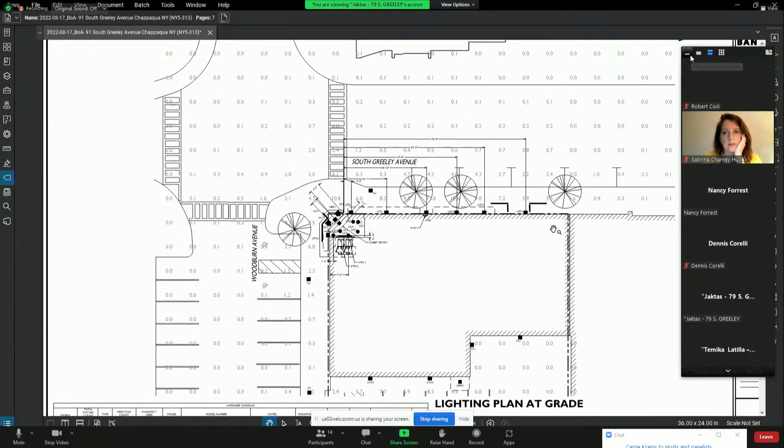Alright, so I'm going to be going through the lighting changes that we've made since our July 5th meeting. Basically, previously, our lighting levels within South Greeley Avenue were a lot higher than the board would like to see. We went back and revised the levels to still meet the state and bank ATM security lighting standards, but also drastically reduce these levels, anywhere from 75 to 80%, along South Greeley Avenue. This has been done by removing those area lights that previously were being proposed along the wall, really getting rid of that stadium kind of feel, and basically proposing only security wall packs. By doing this, you can see the levels have essentially reduced 80% or so all along South Greeley Avenue, and more importantly, we do comply with the state ATM security lighting standard.

So we still have some spillage on South Greeley, but you've indicated that this is now reduced with these new strategies? Yeah, essentially. So along South Greeley Avenue, you can see basically in the middle of the roadway at 0.5 there. Previously that was all the way up to 5, and we were seeing spillage over 1 along the actual opposite side of the roadway. This is basically reduced down to 0 here, really doing the best we can by limiting the amount of spillage that's being created, but also complying with those compliance radiuses associated with the ATMs and the after-hour depository along South Greeley.

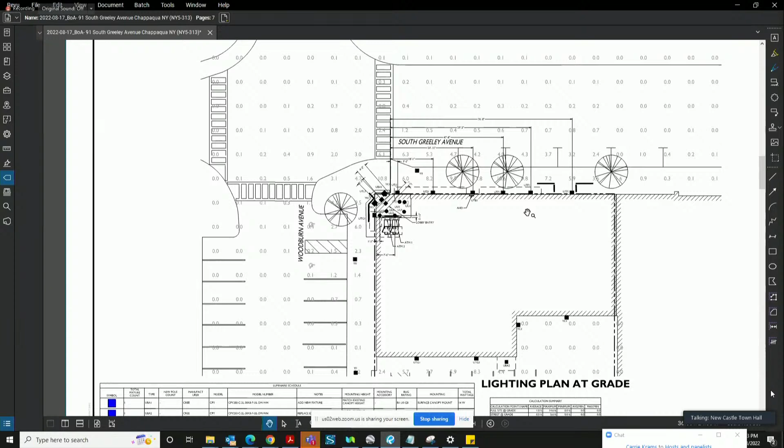I mean, yeah, naturally the LED lights will be more energy efficient. And that's just something the bank, when they're upgrading their sites, is really looking to implement these LED fixtures. Got it, okay. So for clarification, the light level requirements that we're trying to meet here, where, at what point, how's that measured? Is it at the 5 foot height, at the task height of the depository itself? Is it the sidewalk level? At what point is that measured?

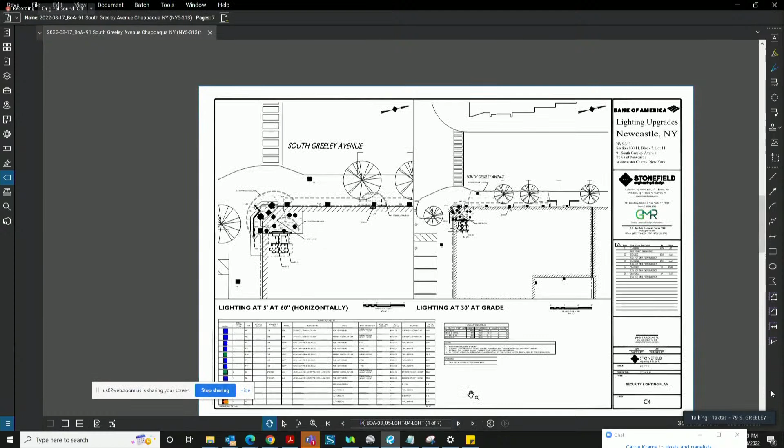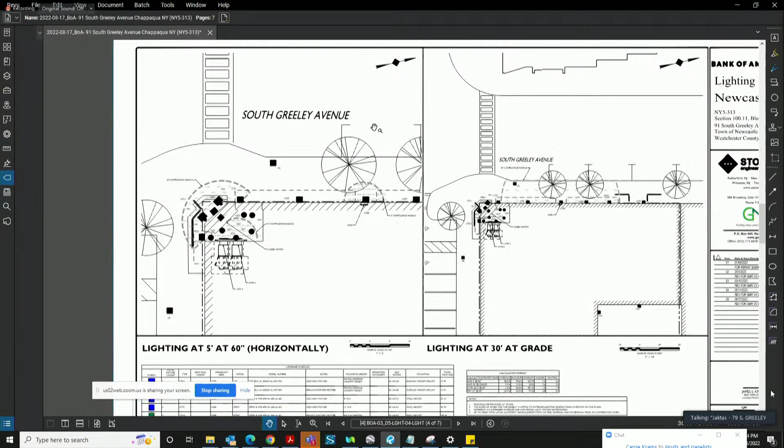So there's different compliance radiuses. I can go to the security lighting sheets that we have. Essentially it's measured at the face either of the after hour depository or of the lobby entrance, all between a 5 foot radius, a 30 foot radius, a 50 foot radius, and a 60 foot radius. And then depending on the compliance radius, it's either measured at grade or horizontally, 60 inches horizontally, or also 60 inches vertically above.

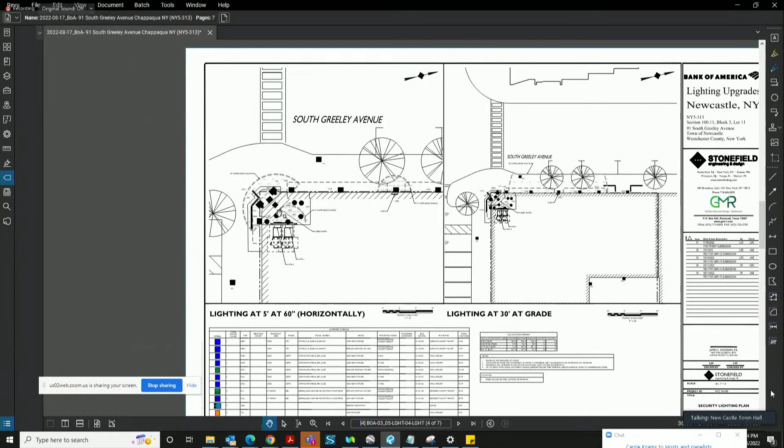Right, and I've seen that from your drawings, looking at them the other day. But I'm asking the question just for the benefit of the public so that they understand the requirements we're trying to meet here, because there may be some people who will say, gee whiz, look at what's happening here. So I'm looking at the requirement for lighting at 5 feet, 60 inches high for that 5 foot radius, and we're up at around 48, 49 foot-candles at the inside of that radius where the wall is, right?

So that's essentially pretty much the task lighting, and most of that lighting is gonna be on these wall washers? Most of it's gonna be on the wall? You're talking about outside of the building or within the actual buildings? We have a mixture of canopy lightings.

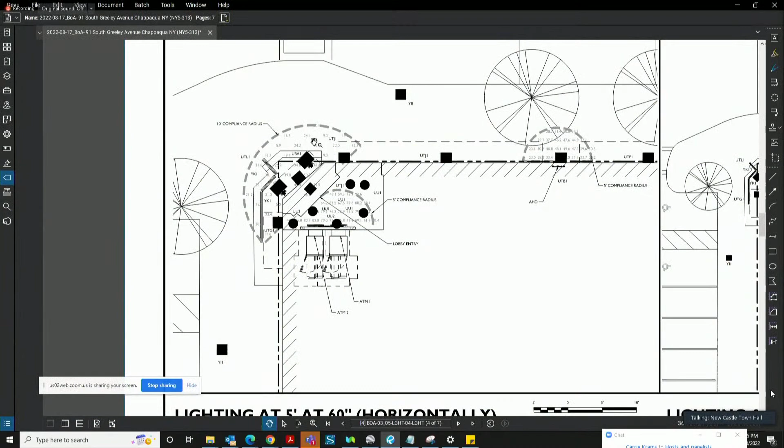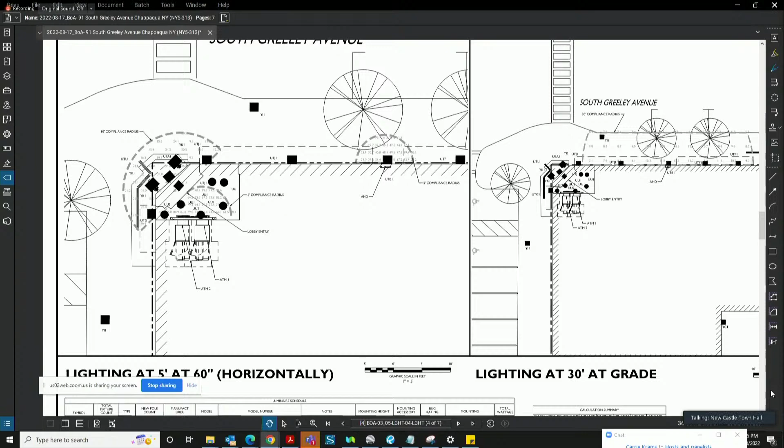Sorry, I was just curious. Last time we looked at this, I think we had talked about an elevation. Is that overkill, just to know the heights at which these light fixtures are?

It's just easier to see it, where they're placed on the side. Mounting heights are provided within the luminaire schedule, but are you asking for an actual elevation of the building?

Well, maybe it's overkill, but I really think it's probably useful because in my mind, these are really too high up. They're gonna literally flood that entire area and beyond. What would also help is probably a photo of something else you have actually installed in some other location. That might help us.

Sorry, I didn't mean to throw a wrench into this, but I just feel like there's way too many lights at different heights, and I'm just wondering if we're overdoing this.

So, I don't disagree. The lighting that is really solving, unless I'm mistaken, the light that is solving the 5-foot radius is UTB1, right? And the other ones that are to the left and the right of that, do they also help you meet the lighting requirement at the 30-foot radius?

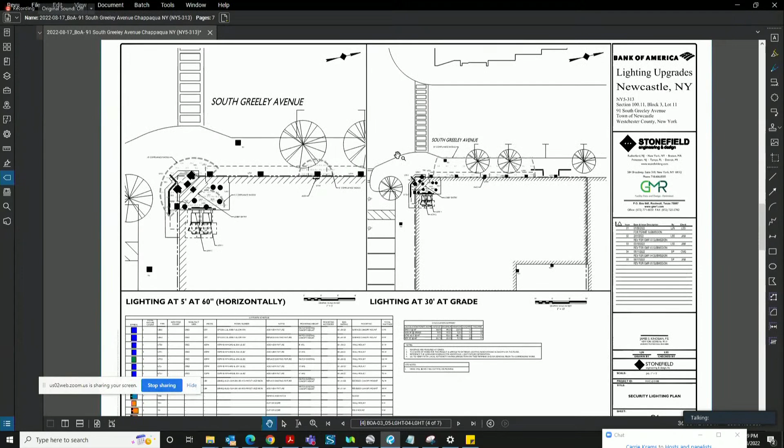So this has previously come up in regards to this one existing fixture that's been here. We haven't modeled it in our design. We really don't believe there's any light that's being thrown from this existing fixture. It's really just more of a decorative fixture for South Greeley Avenue. But the lighting levels that you're seeing here are only for the proposed lights that we are showing.

So I guess you'd say it's only for South Greeley Avenue. It's pedestrian lighting for the sidewalk. I mean, it serves a purpose, and I assume that it provides light to the sidewalk. That's the purpose of it.

Unless I'm mistaken, it just seems to me that we ought to be trying to meet the minimum standard required in order to have this night depository box here, rather than putting more in than we actually need. I understand how it's easier to just take the fixture specs and do the calculations, and it's probably all in the schedule that the manufacturer provides you, and you just put it in drawings and say, okay, this is what we can do. I appreciate that you've done your best to reduce the amount of lighting, but I'm wondering if we still aren't providing more than is actually required, because there is some background lighting there.

There's also, besides the pedestrian lighting, a street lamp lighting here, roadway lighting. Yeah, and I think we talked about this last time, because I think you were to coordinate with Bob Scioli and get information about the town's lighting specifications. And I think even with an eye toward whether it's possible to change the bulb in some of these lights to enhance it and therefore decrease the amount needed on your wall. I don't know if that happened, but I know we talked about it, so this isn't new. Again, we understand there's gonna be some sort of spillover. It's in a hamlet, it's not the end of the world, but we'd really like to get it down to a minimum to accomplish your goals of complying with the state regulations, but at the same time, something that's consistent with the town's rules.

So, I did make that request, but I didn't receive anything. That's my fault. I got a request, I didn't get to it, that's my fault, my apologies.

Well, that would be helpful, I think, if we can get that to the applicant, and perhaps they can work on that and see if that helps at all, having that background ambient lighting as part of the equation.

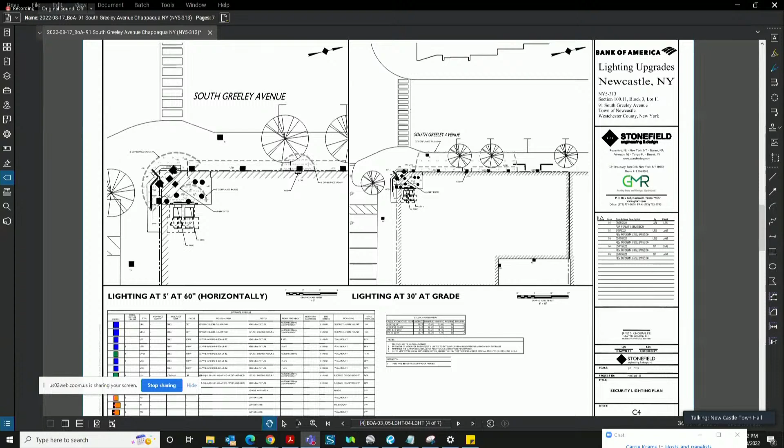I know we talked a lot last time about various canopy treatments, and I'm not sure we saw any of those alternatives. It might be that they just are unworkable, but if you could speak to that issue—did you look at it any further? Is it something that just doesn't work? Is this really the best way to go? Because we did spend a good deal of time on those alternatives last time.

Of course, are you referring to whether or not canopy should remain? Yeah, and I think the lighting within the canopies, to keep the spillage lighting to a minimum, but yet still accomplishing what you need to accomplish to meet the state's rules.

Definitely, and I believe that's exactly what Jason and his team did, because the lighting levels as previously proposed were significantly higher, so there was a great deal of thought put into what we're presenting today to meet those standards, make it safe for pedestrians, while also trying to significantly reduce it and not have that much spillage. So I do believe that the best design was proposed as far as making sure that everyone is happy with the design.

Did we reduce the number of fixtures from the last time? Yes, I think we did. There is a reduction of fixtures.

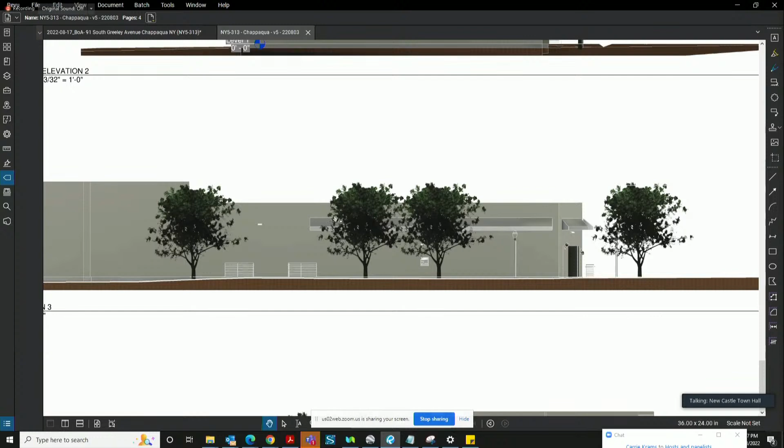Can I ask a question about the building here? The building that I guess we're looking at — how far does the bank tenancy actually go along this elevation from left to right? Because there's another tenant in the building to the left of the bank itself.

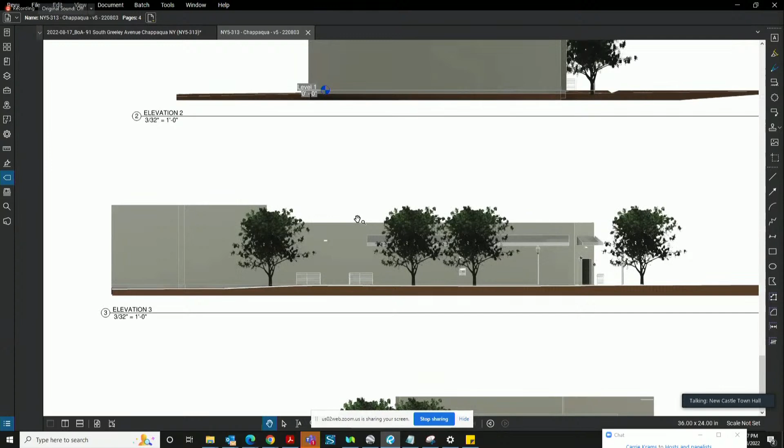Yeah, there's no windows there also, but— There are windows, yeah, I don't know if that's really accurately depicted. We're going to need to figure this out on the elevation, but I wouldn't call this an elevation that is useful for our purposes. It's missing some windows, missing tenants, missing the street light. Just draw it realistically. Actually, your whole facade has got windows, right? On the bank, yes.

Yeah, this is more really just for the fixture locations, we got it. We'll get that updated.

Super, excellent, thank you. All right, so do we have to set a date, Drew, for a public hearing?

Well, it's my understanding that this is a continued public hearing. Yes, it is. I would recommend taking public comments now, since it is a public hearing, and then you would just adjourn the public hearing to the next date. Okay, good point, so we'll take comments from the public on this.

There are none here, so perhaps there's some virtually. Anyone with a hand up? None there at all? Okay, well, not seeing any right now, again we'll just adjourn this public hearing, we'll continue it for the next time.

Is there a calendar date that we can sort of target for the applicant? And then materials have to be in by a certain date? The next submission deadline is September 26th, which is for the October 18th meeting.

Does that sound good? Honestly, I think it depends - the question is for Bob, how quickly he can get the information to the applicant and then how much time they need to revise. I'll do it first thing tomorrow, my apologies.

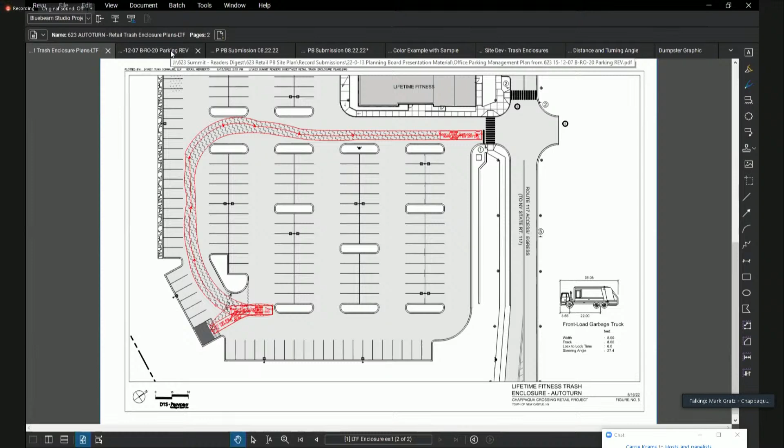We wanted to demonstrate, Bob, based on your comments, how a trash vehicle could enter the site and basically move head-in to that trash enclosure where it's currently proposed to be located, and similarly exit the same way. That's something we did subsequent to the 22nd, but I wanted to have that here to demonstrate and respond to your comments. Going back to the actual—sorry, wrong graph.

So that covered the Lifetime Fitness area. The one issue I wanted to bring up is there was a request for bollards to be placed in front of the trash enclosure for head-on pickups, because of the size of the dumpsters and the need to swing those gates wide open. There wouldn't be sufficient room to place bollards in front of those gates without restricting them from fully opening.

Over at D&E, the proposed use is for smaller 2-yard dumpsters, which will be pulled out at the time of trash pickup by the carters, primarily because there isn't room to provide for a head-in pickup. Also, the smaller dumpsters are proposed to make them manageable for the carters to manually pull out and reposition back in the trash enclosures.

Both of these plans have been vetted with Waste Innovations and were referred to in the letter included in the submission. They stated that with the proposed revision to the entry at the end island over by Lifetime Fitness, and with the use of the 2 cubic yard dumpsters, they would have no problem servicing these trash enclosure locations.

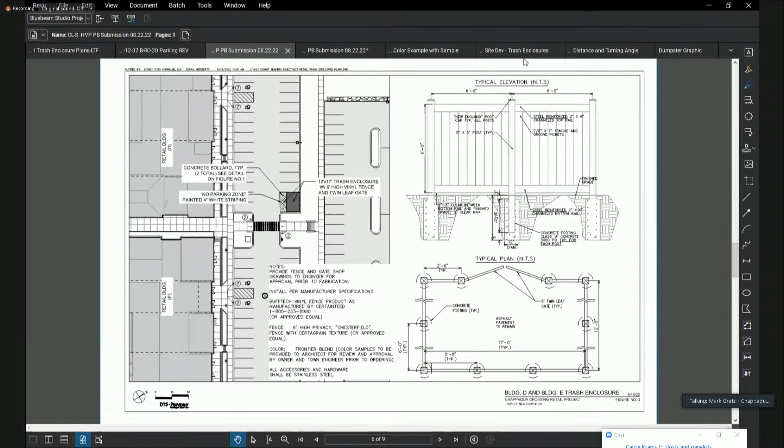As to color and samples, I believe that was addressed back on the 19th, but for recollection, this is what we showed at that last public meeting. It gives you a feel for the fence material and the color being proposed. I think that pretty much sums it up.

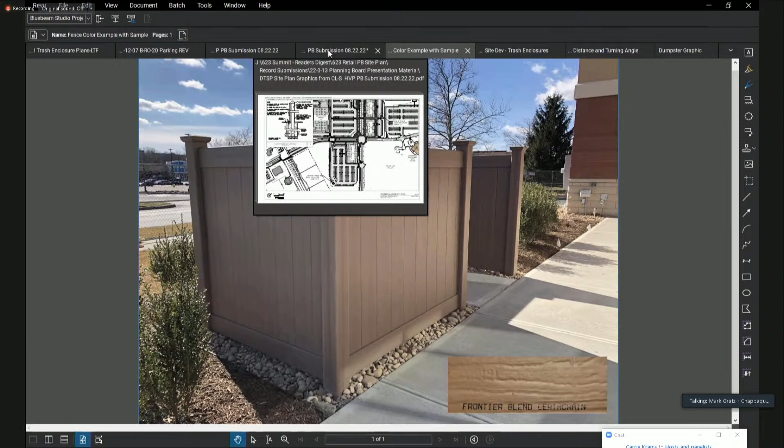There was an issue or question raised about parking, and the fact that we would be losing 4 spaces from the retail parking. I wanted to pull one thing forward from the original office parking management plan prepared back in 2015, because there was some talk about land bank parking.

The land bank parking proposed at the time was all these green spaces related to the office facility. The retail facility, shown here in tan color, envisioned approximately 700 spaces, which is what exists out there today, and we're only talking about losing 4 of those spaces. It's our understanding of the zoning requirement, based on 120,000 square feet of retail space and 5 spaces per 1,000, that only 600 were actually required under zoning.

Also, from personal experience, I've never seen the parking lot 100% occupied in the retail portion. I think that basically sums everything up. I don't know if there are any other questions the board might have, or Diana, if there's anything further you wanted to add.

I'm sorry, there was one other item. Attached to the letter on the 22nd, which Diana had alluded to, there is a letter from the exclusive broker to the project who is of the opinion that the requirement for indoor trash storage is viewed negatively by prospective tenants, and has created an issue with trying to rent out some of the vacant spaces that currently exist.

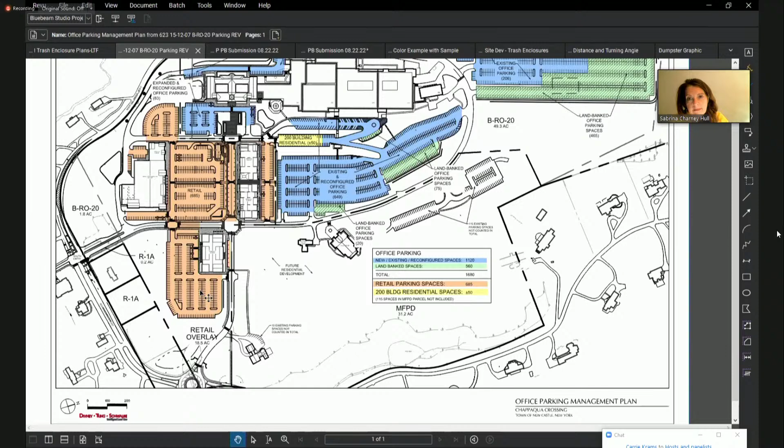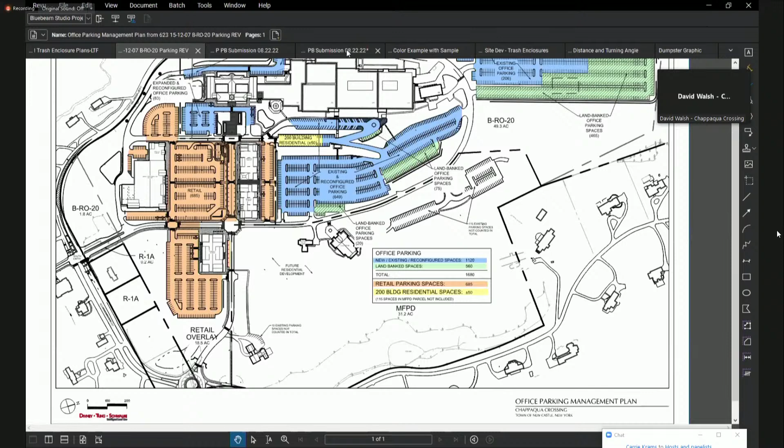Sabrina, Dave Walsh, in terms of keeping track of parking right now, we're not doing parking counts in the retail at all. We have not been asked to do that by the Heitman Group. But certainly with the amount of spaces here on site, even with the elimination of these 4 spots, it still meets the town parking code, and this is a de minimis effect on the parking. So if there's an action proposed in the future that may impact parking, I think they're certainly open to doing some sort of parking analysis on a quarterly or whatever basis you think might be worthwhile.

But right now, for these 4 spots and the amount of activity, both at Building F, which is the Lifetime Fitness, and Building D&E, even though they're not full, there's very little space left. We just haven't seen full parking lots at all, and I'm there essentially every day. So we're open to tracking the parking, and I'm speaking for Heitman at this point. I think they're open to tracking the parking if they come back with some other type of uses. But for this use, it just seems like it's de minimis.

I just want to respond to the statement that there is concern about the parking here and the future of the parking here. I don't have any concerns about the parking here, so maybe the rest of the board does, but I don't support that statement one bit.

Okay, I had a couple questions. I don't think we really need to get into a detailed parking report on this, but I had some questions. I had concerns about what I see here as a proposal, especially for the Lifetime dumpster.

As I understand it, I don't know what the trash is that's generated there, but I know you have a cafe in there. So we have foods, and I don't understand the thinking that we'll just have a bigger dumpster and have it picked up once a week.

I don't see why we would do that once a week and the others twice a week. It doesn't matter, I don't care that much about the size of the dumpster inside the enclosure. If you have smaller ones, fine. But if the large one is giving you the incentive to just have it picked up once a week, then it should be smaller, not larger, because I don't think you should be picking up just once a week. When there's food, that stuff should be cleared out at least twice a week, consistent with what you're doing now. So I don't buy the efficiency being proposed here, that we can get this bigger dumpster and just use it once a week. You've got foodstuffs in there.

The other question I had was the location of the dumpster on D&E. We just recently approved some outdoor dining in that space between D and E. And you're proposing to put this dumpster almost as close as you possibly can to that eating area. It seems to me we should be looking at a different area than that square, perhaps moving it further to the south, maybe the western corner, down further along toward building D.

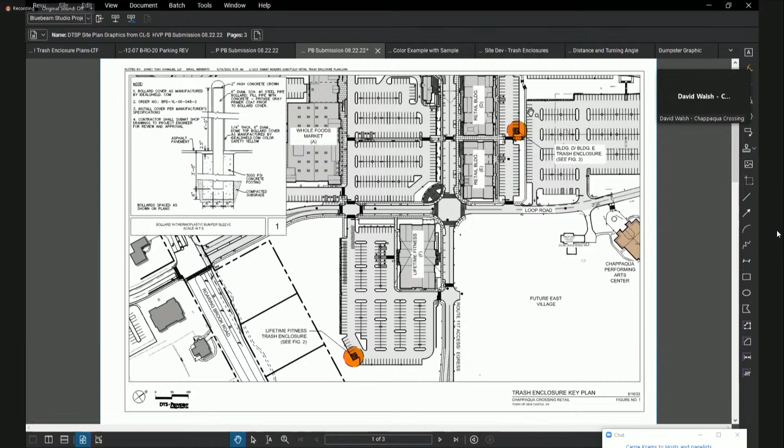It just seems unnecessarily close to an area we just recently approved for outdoor dining. I think we can do better. Mr. Chairman, in terms of the outdoor dining approved for the tenant, which is Sweetgreen, it's located, as you said, in between the two buildings. The dining area is roughly halfway along that alleyway, for lack of a better term. It begins halfway and moves west, toward Whole Foods. So it's not that close.

I mean, the width of that parking lot, we're probably looking at somewhere around, Mark, would you say 50 feet between the front loaded space and where the dumpster is going? So I don't think we're going to have much of an issue with that. In fact, one of the larger reasons behind this is Sweetgreen, because they don't like storing all their compost inside those rooms, and they'll have it picked up more often.

I think if we were to move the dumpster location closer to the office building, moving west on the parking lot as you indicated, it makes it more difficult for people in building E to get their garbage out there. So we were trying to pick a centrally located area that would work best for everybody, albeit not perfect, but certainly in this situation we think it would be the most efficient.

But you're also at that bottleneck where the sidewalks come in for the trucks, at that very same spot. You're also right on the pedestrian walkway. Yeah, we're about 6 feet off the walkway. I understand your points, absolutely, but we just felt that, while it's not perfect, this is what we think is going to be best for both buildings E and D. Fair enough, I understand that.

I'm concerned about what's best for the people, the actual customers who are going to be here. They're going to have residents coming from this new neighborhood who are going to be walking down there and potentially going into the development from that walkway. So I agree with Bob.

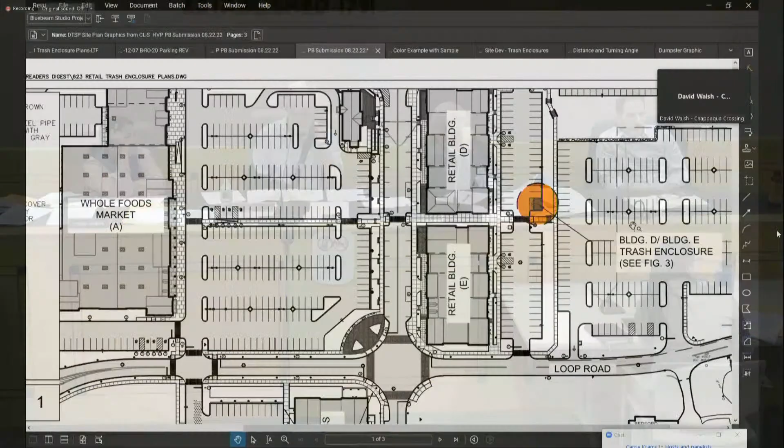I clearly admitted it wasn't the perfect location, we thought it was the most efficient. Certainly, if there are significant objections to it, we can look at an alternate location and show that on another plan. If I was picking that location myself, I might pick the far east side of the parking lot rather than closer to the office building.

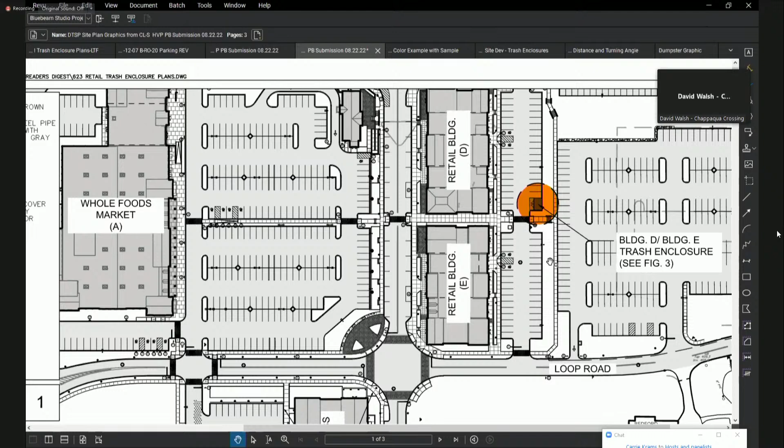But that's going to be very close to your condominiums that you're building. That's even closer to the residential people. Is the parking to the north across the way compromised retail parking? That's designated for the office buildings, I think, not part of the retail. That's correct, it's dedicated to the office, and there's a significant elevation change there between those two lots, about 4 or 5 feet.

In terms of a compromise, shifting it to the east side of that walkway gives a little greater distance separation, and any residents coming from the building or the office would not pass by it. It still keeps it in close proximity to retail E as well. So basically just flipping it onto this side. That's not going to make it.

I have a question - why are you doing this? I understand the hardship you reference, but clearly it's not a hardship since Lifetime is here and Sweetgreen is here, and you said the buildings are for the most part majority full, so it hasn't been a deterrent to leasing the spaces.

It has - Lifetime Fitness has been operating with 2 dumpsters outside since they moved in because there's no room in their internal space for trash storage. This has been bantered around over the many years we've gone through the approval process. This is one of the last items we were hoping to clean up here, but Lifetime Fitness has 2 dumpsters out in that parking lot right now, and that's really one of the main reasons we haven't been able to get a final certificate of occupancy, as this was the last hurdle to get through and hopefully get approved for this exterior use.

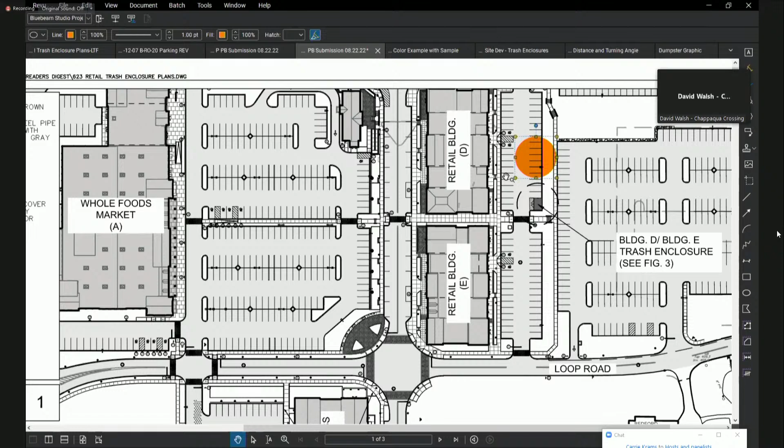So if you can get this material to us, say by this Friday, 3 days, or could I request a week from today? Might be more realistic. Listen, we have a lot of balls in the air in my office with resolutions for other applications and things. We can attempt to try and get you on the October 5th, but I don't want to make that anything more than a soft commitment. I'd rather make a hard commitment by the second meeting in October.

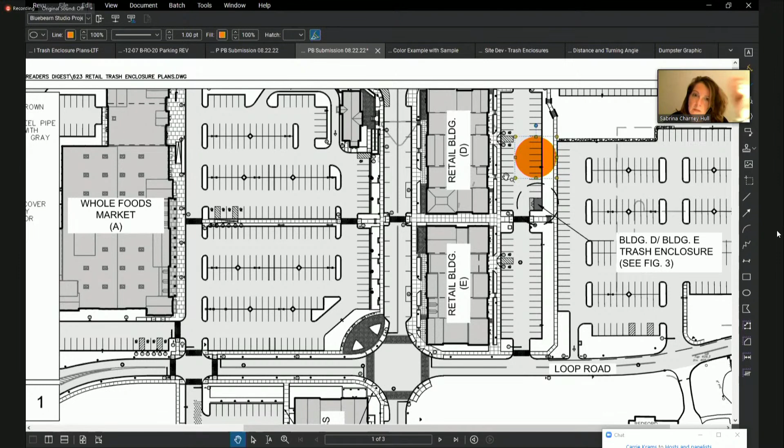And again, in line with what Sabrina just said, I think to the extent that you can get materials into the office by the end of this week, it helps your position to get on the October 5th, otherwise we'll see you in the second one. Yeah, that's what I will do, that's all I can do.

All right, is there a motion then to close the public hearing? Motion. Second? Second. All in favor? Aye. Aye. Okay, so we'll see you soon.

Do you do a motion to direct preparation of a resolution for the next meeting? So moved. Second? Second. All in favor? Aye. Aye.